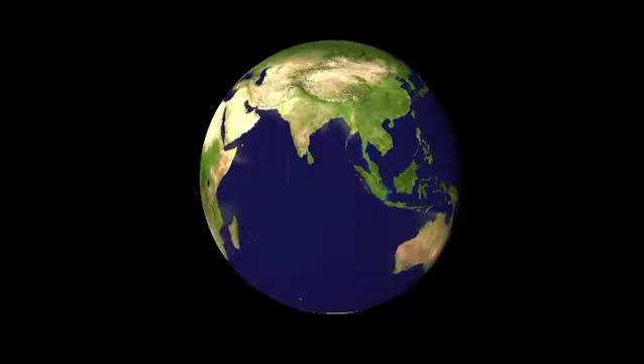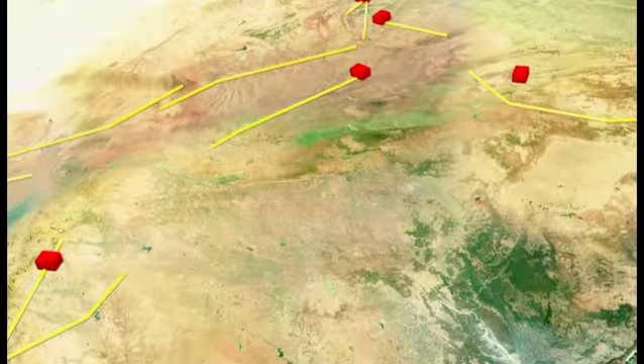Everywhere on our planet, wherever crude oil reserves exist, an intricate network of pipelines dominate the landscape. Like arteries in the human body, they carry oil and gas that is essential for the mobility of the human race.

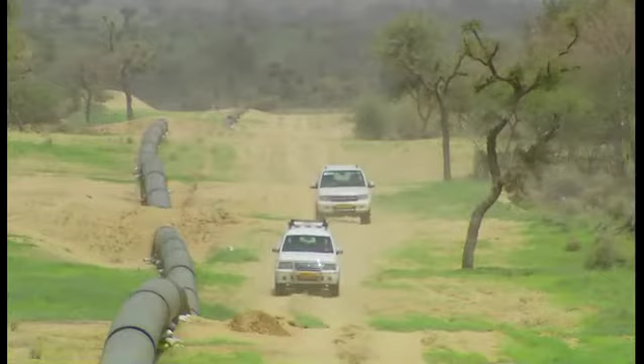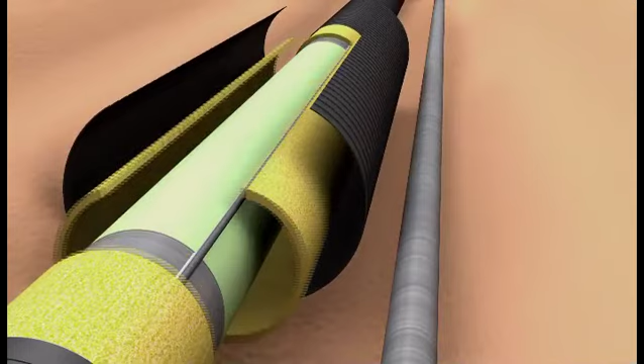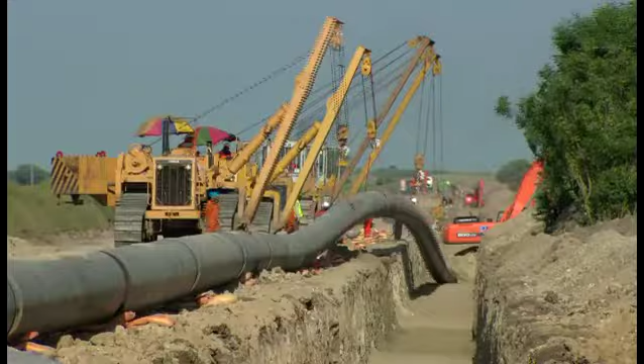Today, hundreds of pipelines run across thousands of miles, connecting entirely different cultures and economies. With the passage of time, these pipelines are getting better and smarter, ferrying large quantities of crude with increasing efficiency. This is the story of a pipeline that will take the world of engineering to new heights and will perhaps open new avenues for the world of oil and gas.

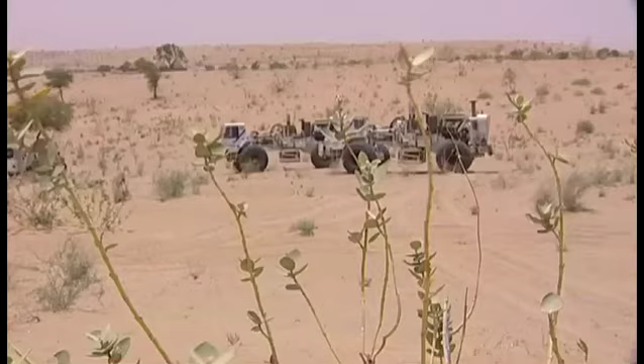Hydrocarbons in the desert district of Barmer, in the state of Rajasthan, remained undiscovered until the 1990s. Although some geological and seismic data indicated that oil and gas could be found, the exploration companies couldn't find economically viable quantities. Cairn had been exploring the southern part of Rajasthan block without much success.

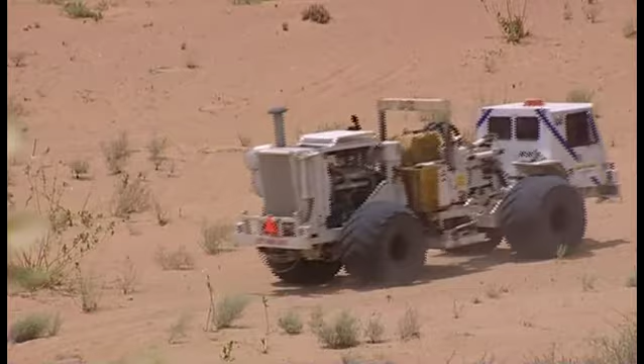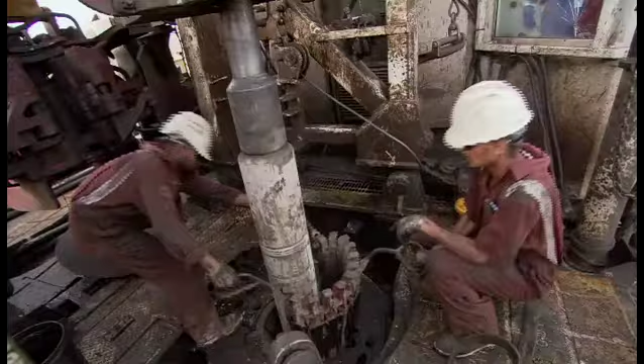But things turned around in 2004, when Cairn's exploration team moved to the northern parts. This was a path-breaking move. It changed the fortunes of not just Cairn, but also its stakeholders and thousands of people around Barmer. A few months later, Cairn discovered crude in the Mangala field. It was the biggest onshore oil discovery in India in the last 20 years.

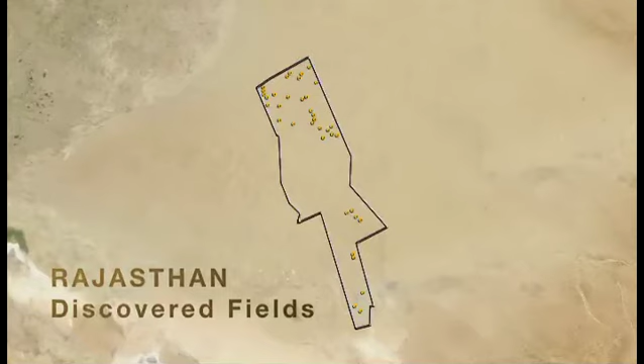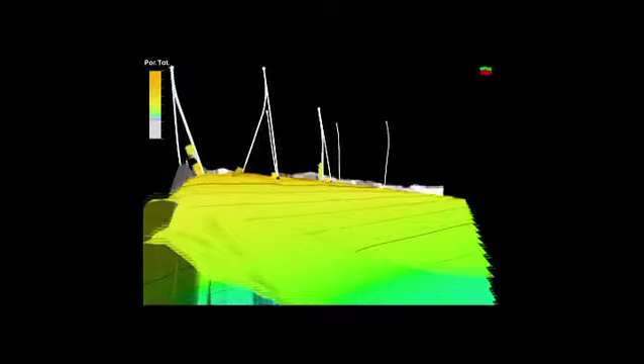One after another, 25 discoveries were made. Altogether, 4 billion barrels of crude oil have been discovered, out of which 1 billion barrels of crude oil is recoverable, enough to contribute 20% of India's domestic crude production in the coming years. For Cairn's joint venture partner, ONGC, this discovery consolidated an already strong relationship.

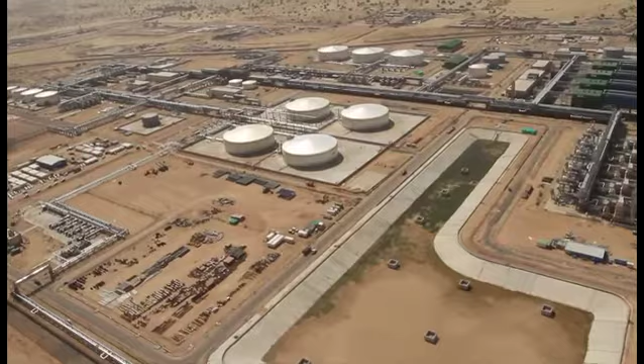The downside was that the crude discovered had a waxy consistency and a high pour point, which means that to remain in a flowing state, the crude needs an unusually high temperature of more than 64 degrees centigrade. As the temperature drops, the crude turns into a jelly-like substance and eventually ceases to flow. Cairn was planning to produce 240,000 barrels of oil per day in the years to come.

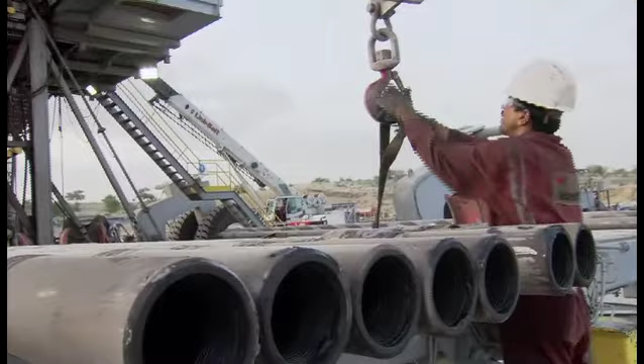The nature of the Barmer crude demanded special extraction facilities, as well as sophisticated refineries. But the oil fields were hundreds of kilometers from the refineries, so the challenge was to take the crude to the buyers. About 3.5, 4 years ago, we realized that the quality of the crude was such that it was going to be difficult to transport it. It was going to require a fairly specialized technology, a very unique technology to transport it.

And we also realized that the government nominees were unable to construct the pipeline. So we then, in conjunction with the government, through a fairly extensive consultative process, agreed to build the pipeline. And this was the best way and the fastest way really to start producing the crude and to take it to market.

The pipeline that Cairn decided to build was by no means an ordinary steel pipeline transporting crude oil. The proposed pipeline would need to maintain the temperature of the crude oil above 64 degrees centigrade to allow it to flow. Before the Rajasthan discoveries, Cairn was primarily an upstream company that had focused on exploration and built development expertise in South Asia.

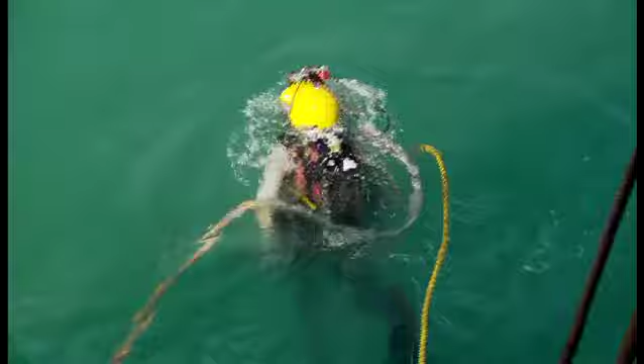It had no prior experience in making pipelines on a very large scale, especially pipelines that were required to traverse plains, deserts, and a number of canals and rivers. The challenge was to map out the shortest possible route that would ensure maximum points of sale, minimum damage to the environment, and minimum interference with livelihoods of people during the laying of the pipeline.

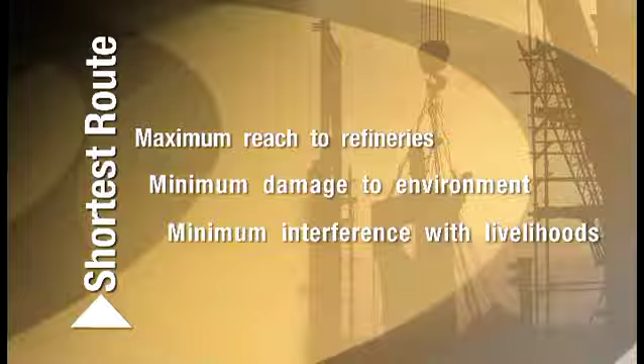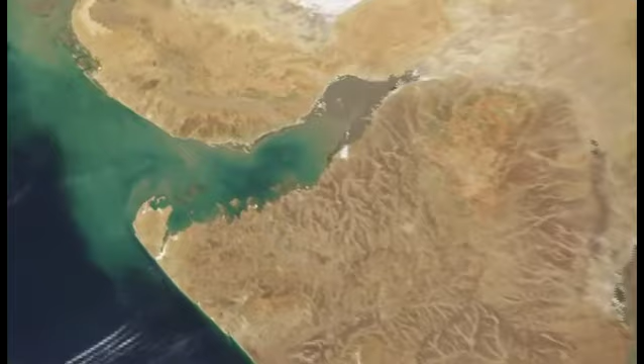The initial proposal for the shortest route would have run through the Gulf of Kutch in Gujarat. The Gulf of Kutch is a fragile ecosystem and home to several marine and avian species. Even though it added 75 kilometers to an already ambitious pipeline, Cairn altered the route in order to preserve the environment.

The environmental issues are quite significant on a project of this scale. But we have a specified route which we've studied long before we put anyone on the ground to do any work. And that route takes into consideration environmentally sensitive areas. We have to do an environmental impact study and a social impact study.

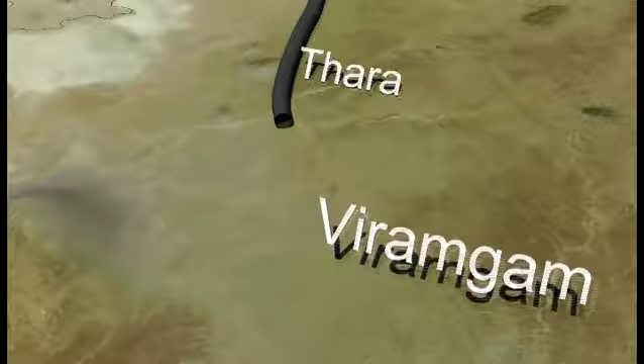So we have to be mindful of communities, water sources, cultural relics or religious temples or any other religious site. So that's all taken into consideration when we select the route. The total length of the pipeline was now nearly 700 kilometers. From Barmer to Bhogath, the pipeline would have to negotiate hundreds of crossings.

By the first quarter of 2007, the technical team at Cairn had solved the issue of how to keep the oil flowing. All the major concerns about the sale of the crude, preservation of the environment, and the success of the technology had been addressed and sorted out.

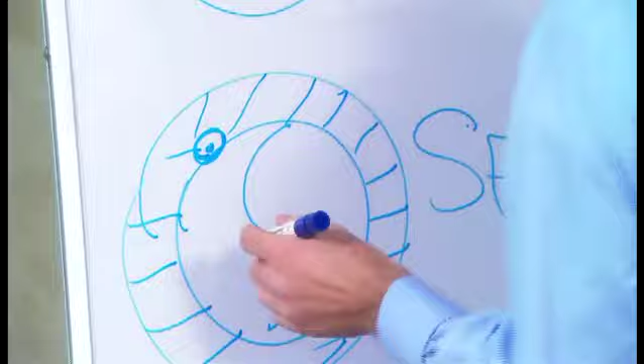Cable inside which basically heats the pipeline and keeps the oil flowing. If we were to pump the Rajasthan crude into a regular steel pipeline without insulation and without any heating system, very quickly the crude would cool down. And as it cooled down, it would become harder and harder to pump. And actually, within 200 or 300 kilometers, it would start to solidify and you couldn't pump it at all.

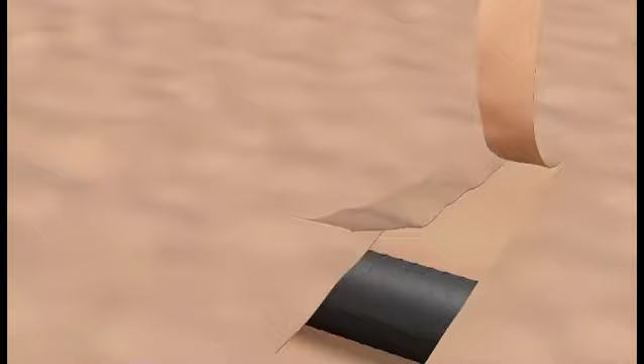The answer emerged in a technology known as Skin Effect Heat Management System, or SEHMS. The 700 kilometers long pipeline was to be laid 1 meter under the ground. 2 sets of pipes were to be laid next to each other. The larger 24-inch pipeline was to carry the crude, and the smaller 8-inch pipeline was to carry natural gas produced in the Rajasthan fields. The larger pipeline was wrapped in 3 layers of insulation.

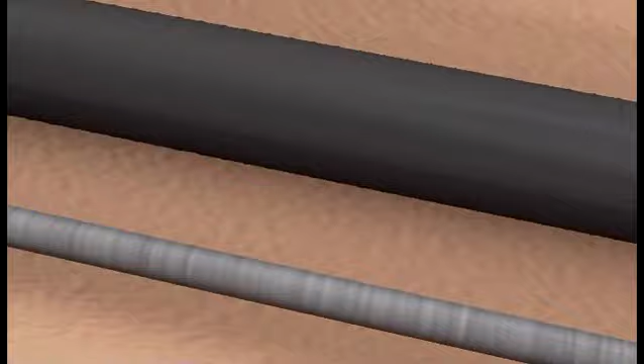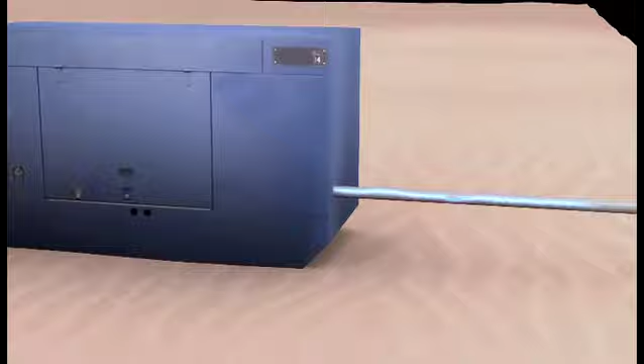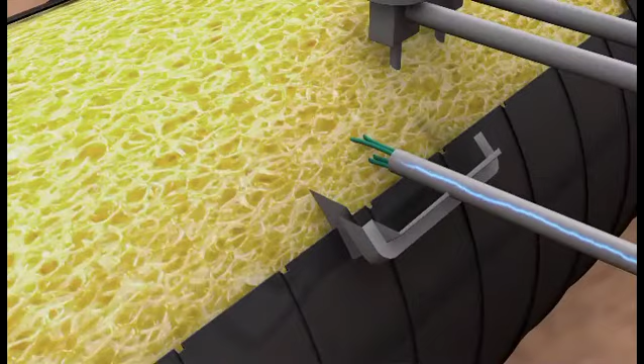These coatings would not only minimize heat loss, but also protect the pipeline from physical damage. The smaller 8-inch pipeline was going to supply clean natural gas to generators of 1 megawatt each, stationed every 20 kilometers along the length of the pipeline. The generators would pass an electric current of 4,000 volts through a high voltage cable placed within a 1-inch tube. This 1-inch tube was welded to the main pipe carrying the crude oil.

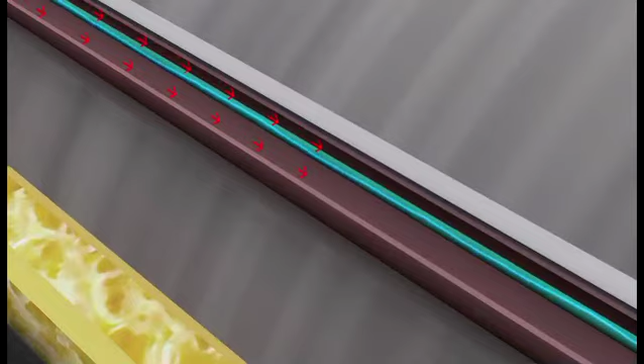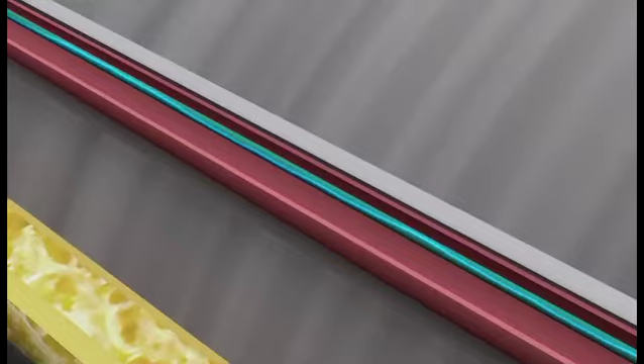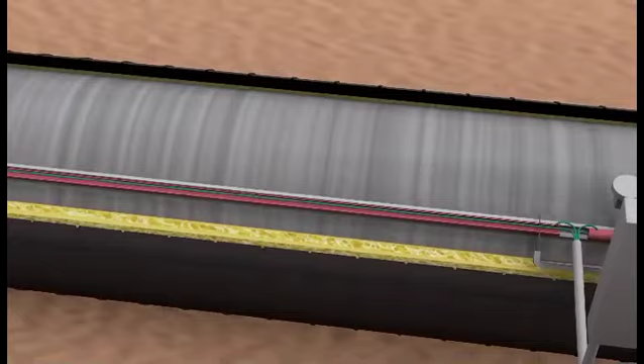An electric current was to run through the cable and then flow back inside the inner walls of the 1-inch tube. In SEHMS technology, the 1-inch steel tube, which has a high density, resists the flow of electric current owing to its densely packed molecules. This resistance causes the temperature of the steel tube to rise. Eventually, the temperature of the tube rises to as much as 90 degrees centigrade. This heat then gets transferred to the main carrier pipe through conduction, where the hot oil is already flowing.

In some ways, the SEHMS system is the lifeline of the pipeline. In the event that the flow slows down or stops, perhaps in an upset or for operational reasons, the risk is that the pipeline could turn solid and then you would be unable to pump it. But with the heating system, you always have the ability to heat the pipe up and to remelt the crude and to keep it flowing. We conducted a field trial test of over 1 kilometer of line, and we later on came to know that the results are exactly and even better than the design.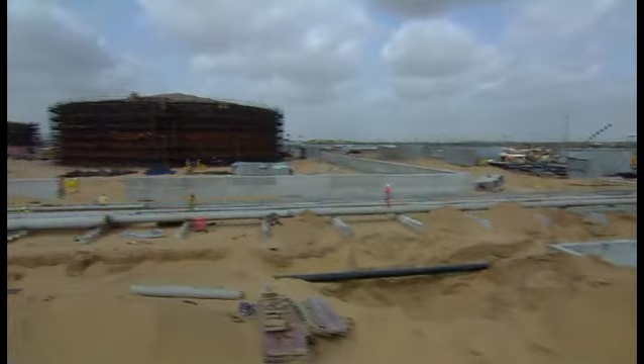Cairn was now ready to construct the world's longest thermally heated pipeline. A company that was never in the pipeline business was now about to create history in pipeline engineering. Suddenly, the pipeline division in Cairn's office began to buzz with activity. A small team of 7 members quickly grew to over 300. We've assembled one of the best teams in the world in the pipeline business, and the best brains from all over have come to conceive the pipeline, do all the engineering work.

After months of planning, it was now time to move to the field. The construction process commenced by informing more than 50,000 landowners through whose lands and fields the pipeline would eventually traverse.

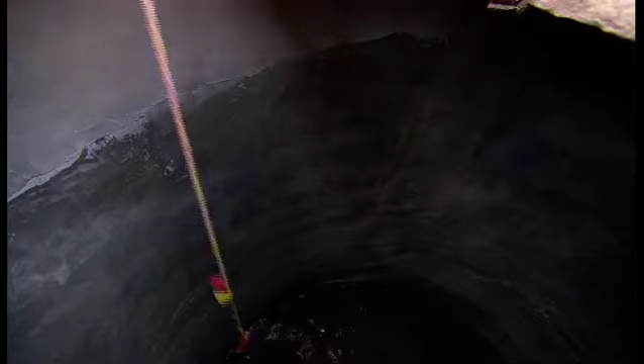To create a long-term relationship with the people living along the route of the pipeline, Cairn started a number of community engagement programs. Today, more than 40,000 farmers and their families, along with the local administration, are benefiting through agri-kiosks, SMS-based agri-alerts, health checkups, along with water harvesting and sanitation schemes. Farmers are being taught new and scientific methods of farming. They're also getting a fair price for their produce.

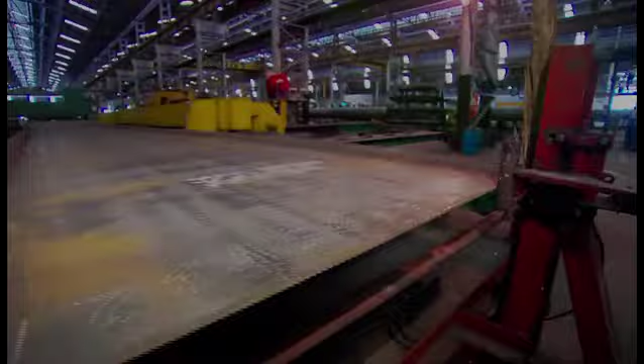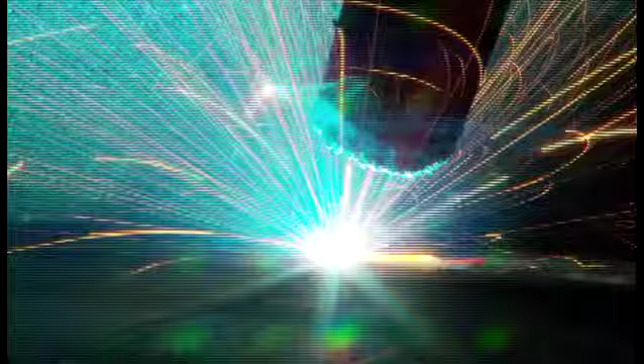Meanwhile at Mundra, the pipes were produced in accordance with strict deadlines. Heavy sheets of steel were rolled into pipes and welded according to stringent specifications. Each pipe produced in this facility went through several quality tests, including X-rays and ultrasonic rays.

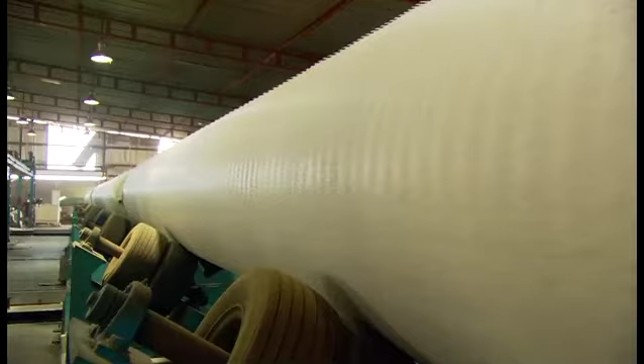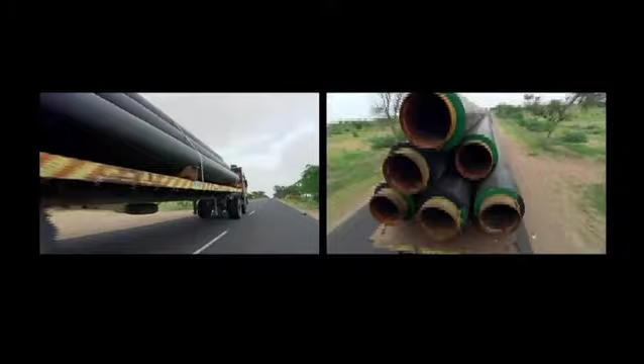These pipes were then carefully transported to several different locations throughout the length of the pipeline. Each stage of laying the pipeline was carefully planned and executed. First, the notified areas were marked and cleared of all vegetation. Necessary permissions were sought and compensation for using this land route was paid before the work began.

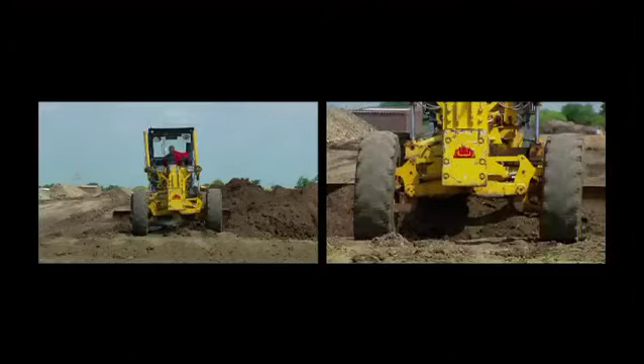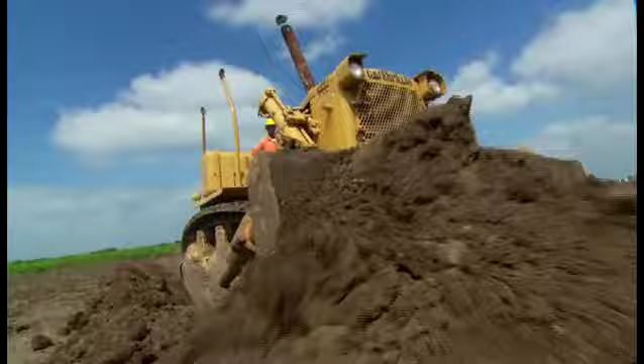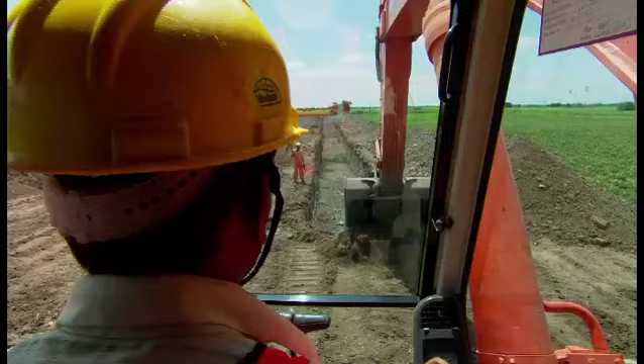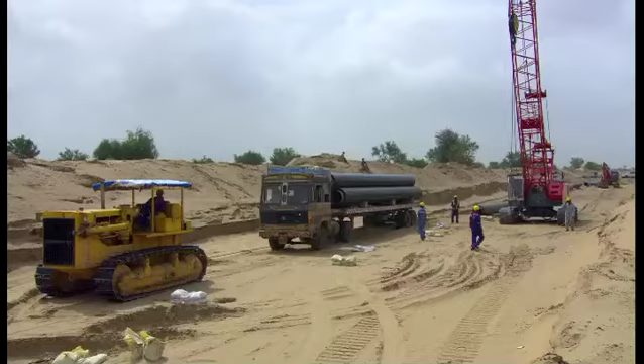A project of this scale and size requires intense discipline, planning, and foresight. But more than anything else, it requires safety and the welfare of its people and those living nearby. At the end of the day, it's all about people. And people should go home from work just as well as when they arrived at work, so that they are not suffering any harm from the activities that we conduct during the course of our business.

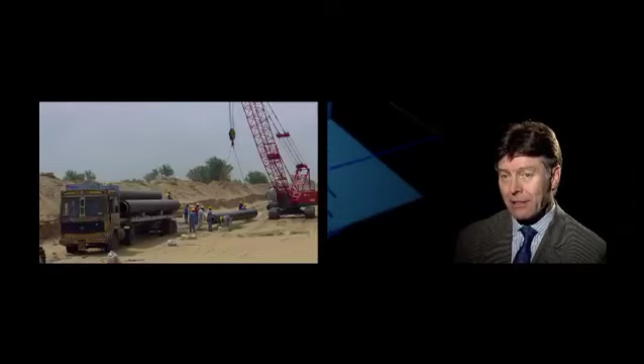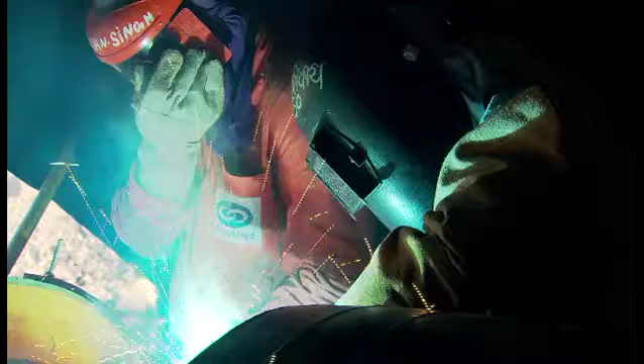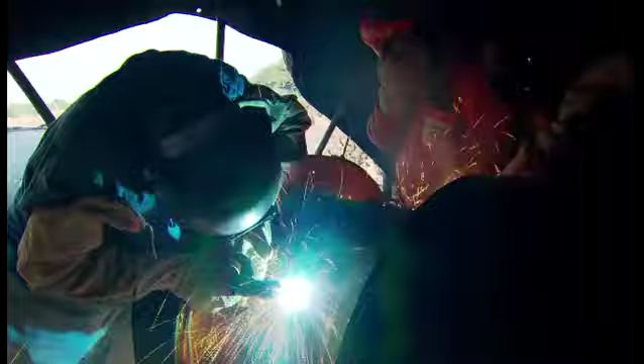After the pipes were laid end to end, the joints were welded. Stringing and welding are labor-intensive and time-consuming jobs. During summers, the temperatures in Rajasthan can soar to 50 degrees centigrade. The heat generated by activities like welding can further reduce the efficiency of the field crew. Yet, Cairn and its main contractors, Larsen & Toubro and Punj Lloyd, succeeded in adhering to their deadlines.

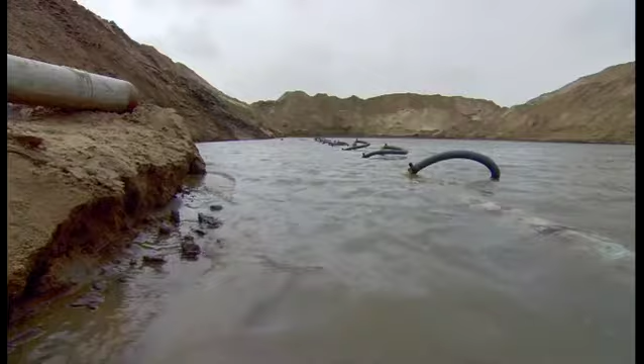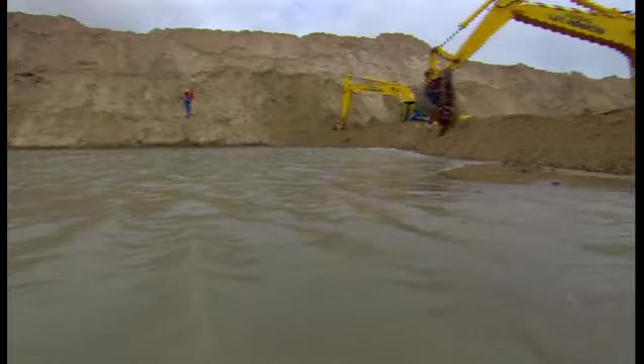100 kilometers away, it was not the heat that bothered the crew. At the Luni River crossing, shallow underground water had seeped in and formed an unwanted pond. Moisture is the enemy of any pipeline. Long-term exposure to water can cause rusting and will eventually reduce the life of a pipeline.

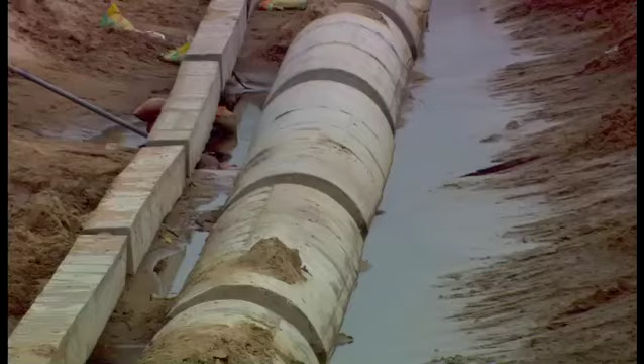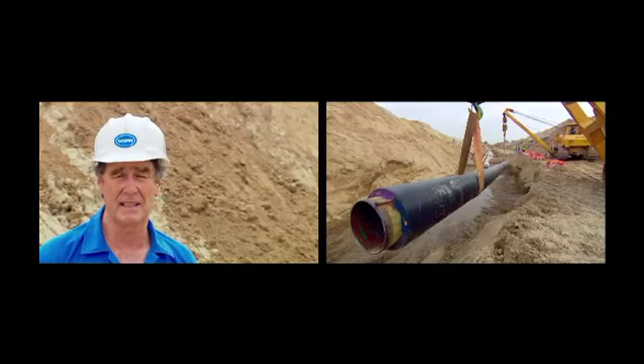Sukhri and Luni are among several dry rivers that the pipeline had to cross. Once in every 40 years, there is a likelihood of their flooding, thus wreaking havoc with the pipeline. So here, the pipeline was laid 10 meters under the ground with an additional concrete coating. There's no water in the river course, but it could be today, it could be tomorrow, and it may never be in this monsoon, but we can't take that chance. So we have to calculate the scour level, what was the historical data of the deepest scour level, and then we lay the pipeline 2 meters below that deepest scour level.

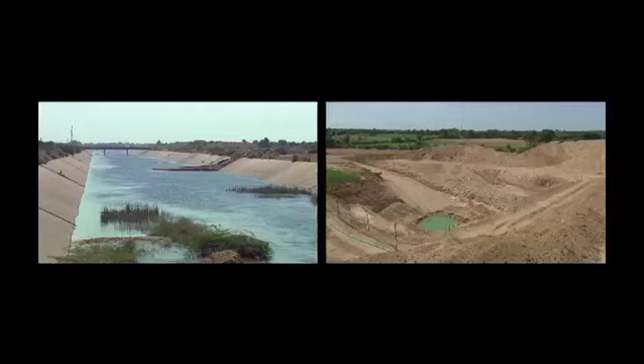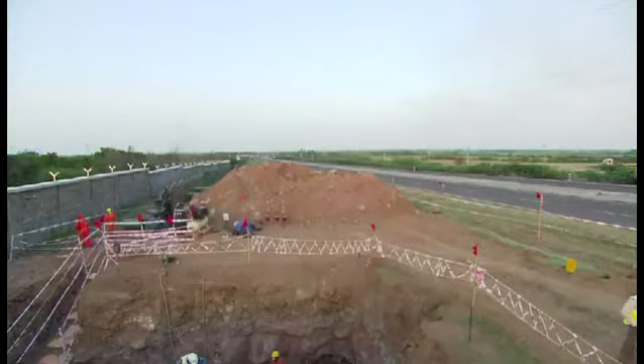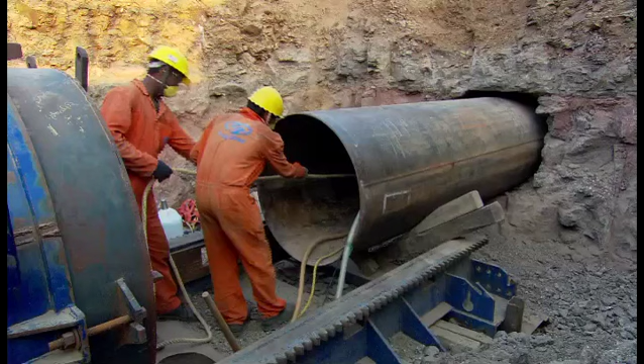A few kilometers downstream, the team at the canal crossing had to tackle another engineering challenge. The pipeline was to run under a canal that is 15 meters deep and 160 meters wide. This canal is a lifeline for thousands of farmers living downstream. With the help of research provided by institutions like the Indian Institute of Technology in Roorkee, 700 such difficult crossings were negotiated. State-of-the-art technologies like micro-tunneling were used to excavate the earth and lay the pipes.

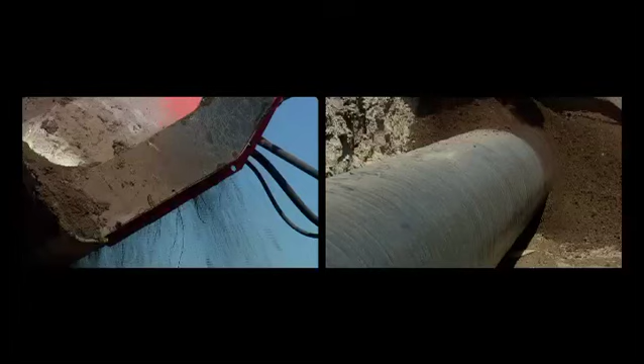After a substantial length of the pipe had been welded, tested, and approved, it was laid in the trench. 4 heavy-duty side booms carefully lowered the main 24-inch pipe. The trench was then filled with a layer of soft soil. Then the warning tape and the optical fiber cable were laid. The trench was backfilled and the land was ready to be returned to the farmers.

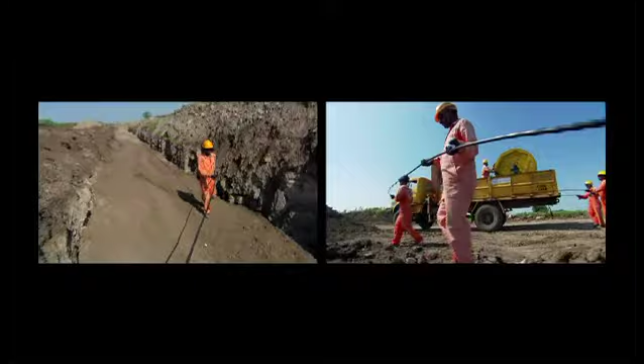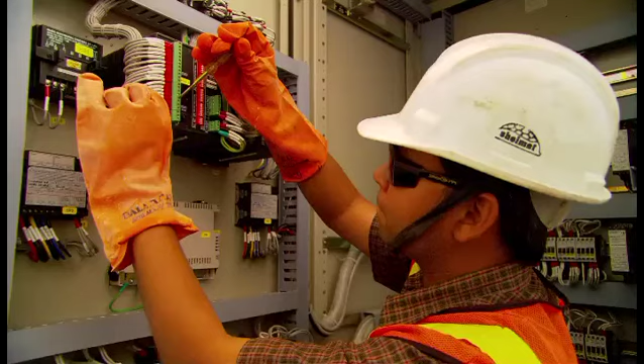Above-ground installations, or AGIs, built every 20 kilometers all along the route of the pipeline, were also commissioned. The AGIs would supply clean electricity to the SEM system for the entire duration of the project. The pipeline laid, Hari Ram has had his land returned to him. Once again, he has sown wheat. In a few months, when he harvests his crop, thousands of barrels of oil will flow under his farm.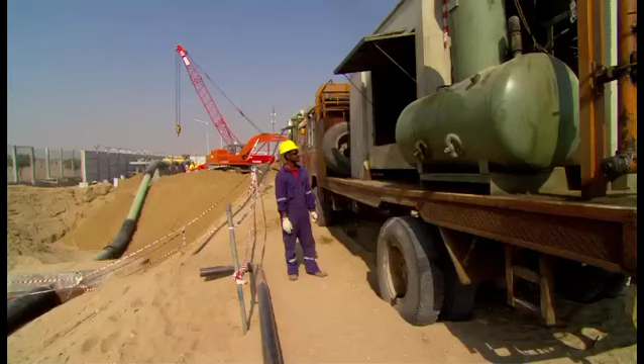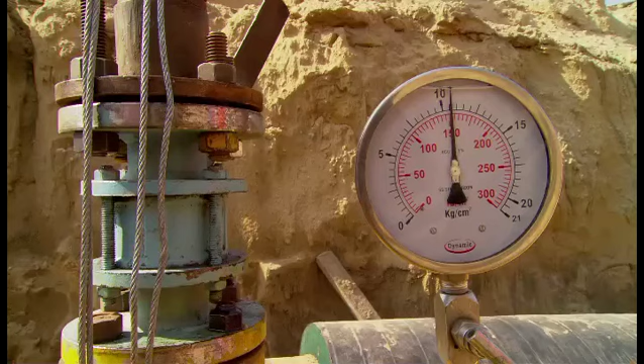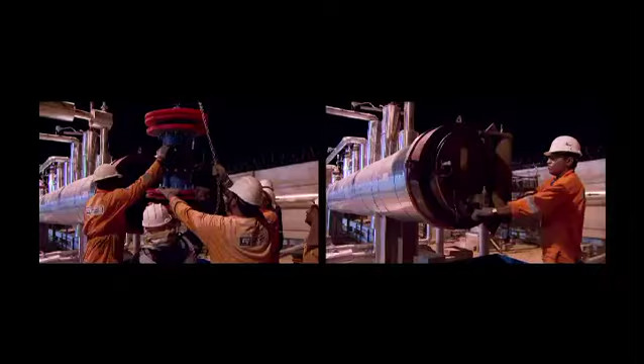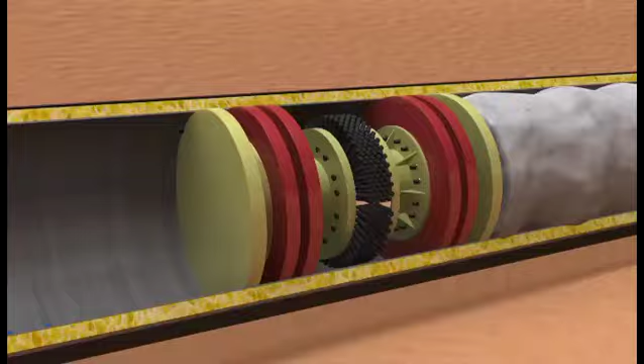At the Mangala oil field, the commissioning team conducted final tests on the pipeline. The entire length of the pipeline was pressurized with water to detect any leakages. After the water had been drained, the pipeline was purged with nitrogen to prevent any internal corrosion. After this, one by one, 4 pigs were sent through the pipeline as a final process of commissioning. The pig train carries a selection of chemicals to clean the pipeline of moisture and any other unwanted foreign material. These chemicals would also prevent any kind of internal corrosion.

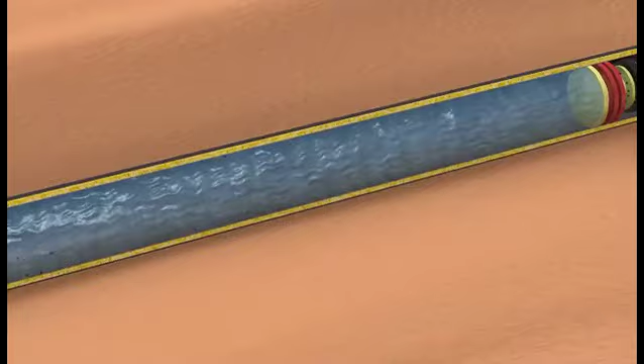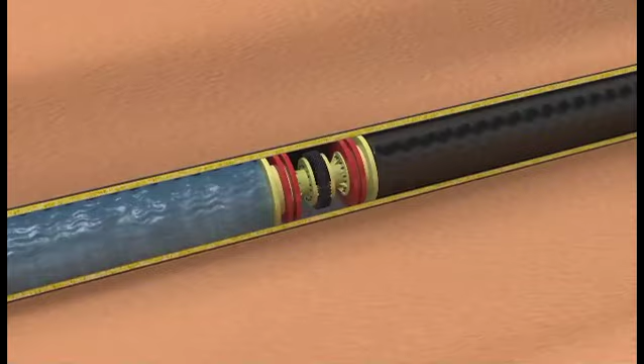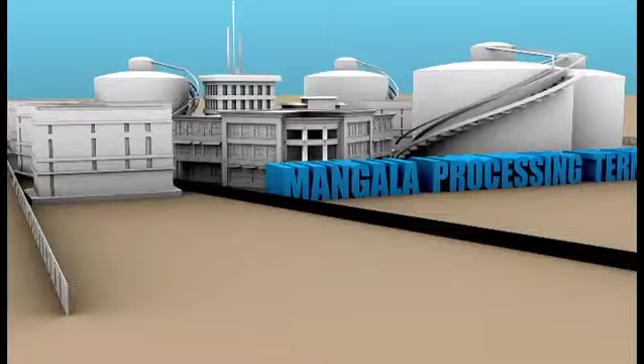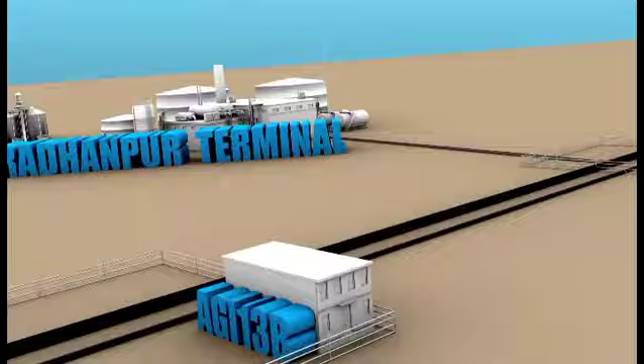The moment everyone had been waiting for had finally arrived. With the insertion of the 4th and the last pig, the oil was introduced in the pipeline. What began as a daring idea was now a reality. Cairn's dream of taking the viscous crude to the market had finally taken shape. This is the only pipeline in the world that is insulated and thermally heated all along its entire length of almost 700 kilometers. No other pipeline has an intricate network of 36 AGIs to provide clean electricity to the heating system for the entire lifetime of the project.

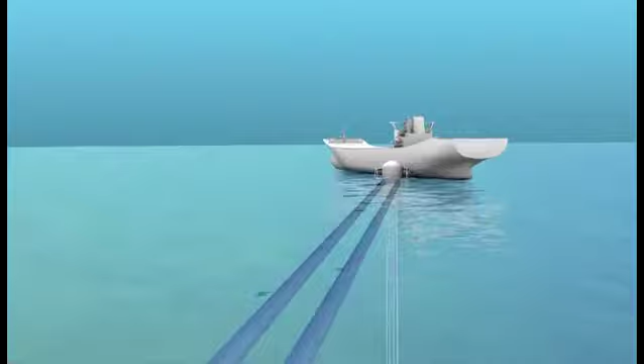For Cairn and its partners, all this effort has been more than worthwhile. The pipeline is touching 70% of India's total refinery network and helping to improve the country's energy security. The project, of course, is truly transformational for the state of Rajasthan because every barrel of oil that we're producing, 20% of the revenues are accruing to the state of Rajasthan in royalty revenues. And for our nation, of course, it's truly a national project because we're now going to be delivering soon over 20% of domestic production, and that's going to have very profound implications in terms of energy security and also in terms of savings.